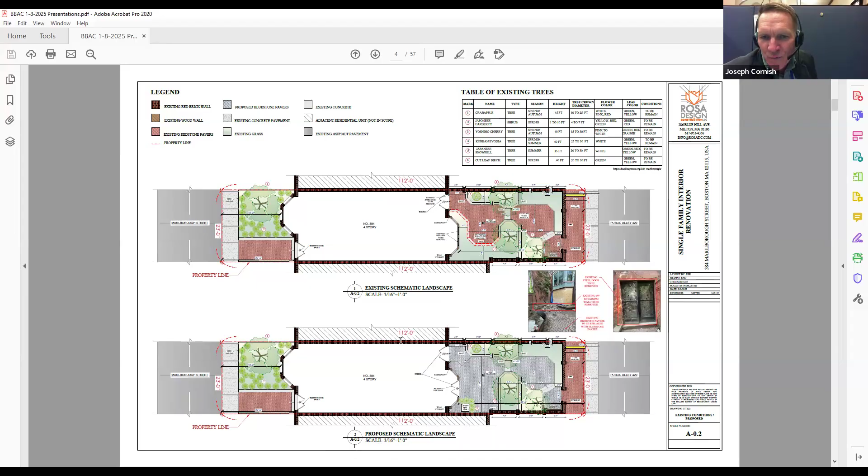Was there some concern, Joe, about the drainage? Yeah, I don't know that it specified how these were going to be laid when we reviewed it. So I think the real concern is the health of the trees, the existing trees, and that the concrete is pulled away. And I think the proposed care schedule, if we can confirm it is appropriate, that is done in the coming year. Yes. Fair enough for me for that particular part.

Thank you. All right. So Gina, should I move on to the roof? Sure. Okay. All right.

So it was brought to my attention that there may be, at the last hearing, roof work executed that was not approved by the commission. So this roof deck was remanded to staff for me to go out and review the mock-up to make it minimally visible from the street. So I did do that.

This is what I approved, and I can say the front railing is, although it is somewhat visible, it is in the location and the height that I approved it. But the rear railing was installed in kind of a jogged way. And here were the locations of the mechanical units that have been installed over in this area. Can you see my cursor here? Yes. Okay, I'll just show you.

So here's the front of the building. That was the location of the mock-up that I saw. I don't remember if it was another cold day in 2023 when I went out to look at it, but we moved it and adjusted it a few times, and it just -- we looked at moving it back further, and it wasn't really going to be any less visible.

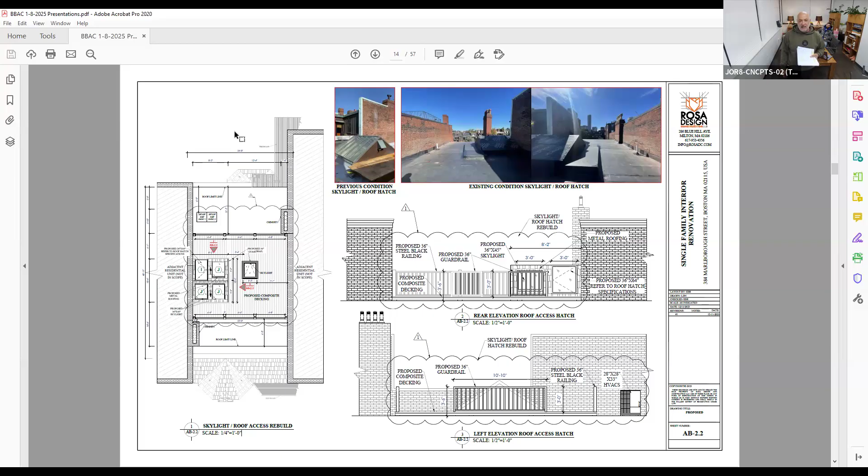Okay, so it goes inside the chimney. And then, where the short piece of the railing is, that's the correct place. The longer piece needs to line up. Okay, yeah, we can get that done. Good, I'll make a motion. All right, we'll check up on it if we need to.

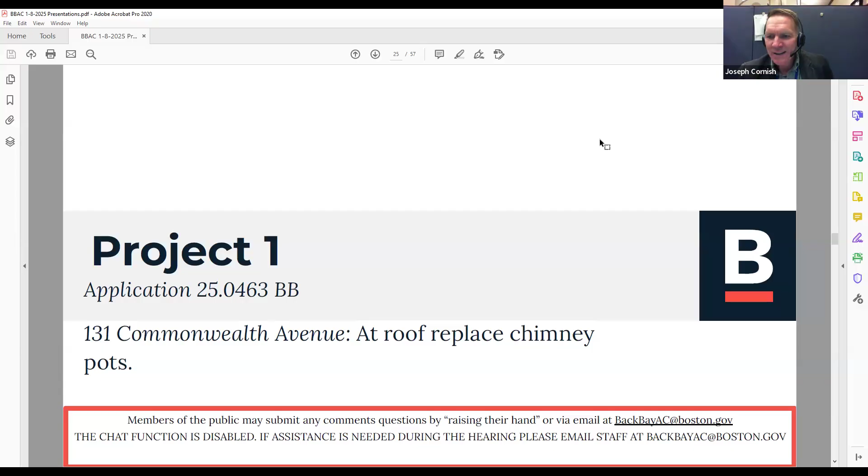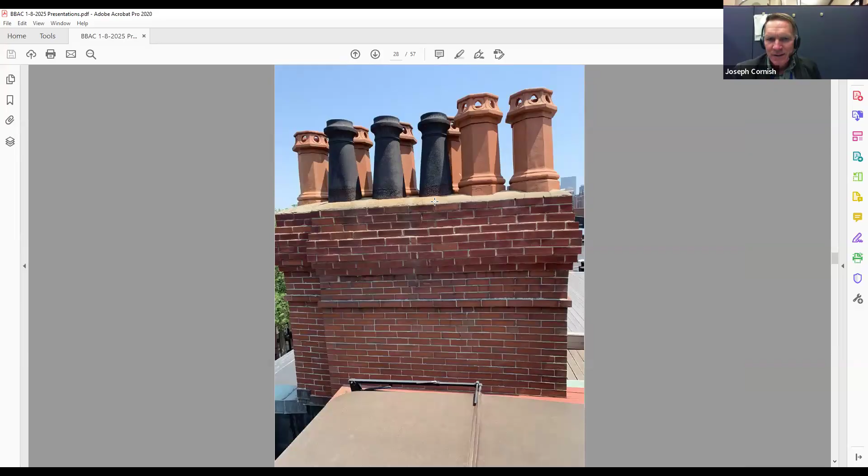Ryan, I did add some photos to show existing conditions. Here's the front facade, here's the chimney. If you can see my cursor, one of the chimneys where the chimney pots are being proposed for replacement. And here's a rooftop view, front facade, and here is the second chimney where the chimney pots are being proposed for replacement, with close-up views here. I think this is where your presentation begins, Ryan.

Correct, yes. This is representing the existing chimney pots at our chimneys. There's a combination of cast iron chimney pots as well as clay chimney pots with a bit more of a decorative cap. Currently the cast iron pots are deteriorating a little, especially at the base, where they're compromised where they meet up with the chimney. So we know those need to be replaced, and in an effort to keep it consistent across the board, we'd like to replace them so that they're matching across the spectrum with a simple round chimney pot, like the one you see right there.

If you go back to the previous page, the blue dots signify where we have the existing cast iron chimney pots, and the light orange shows where we have the existing clay octagonal chimney pots.

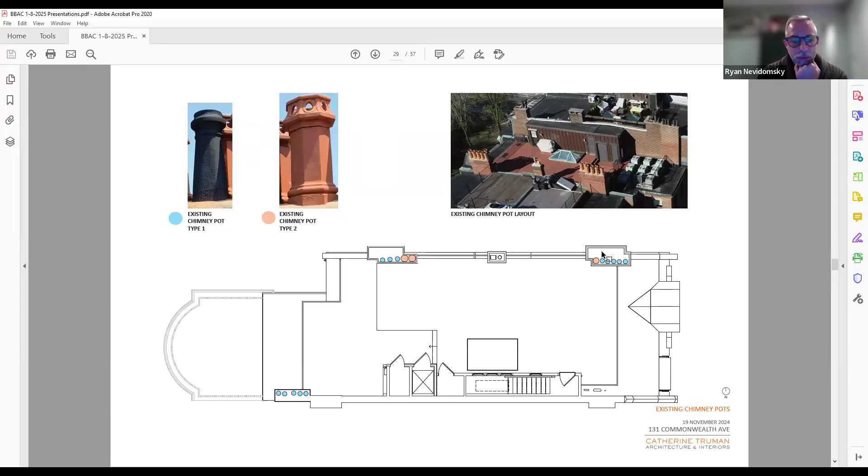So what we need to do is actually introduce some equipment to augment the fireplaces and make them code compliant for the gas fireplace and/or wood burning fireplace where we have them. So we have this laid out to show you where we will have blank chimney pots where we don't have the flues in use for anything. Those will be left alone as is, with no equipment on top of them.

The next one is in a spot where we will have the wood burning fireplace, and this is meant to help increase the smoke flow from the wood burning fireplace itself. We need to increase the ventilation because of the length between where the fireplace is and where the chimney is.

The next type is for preventing backdrafting from where we have open gas log sets in the house, and those are in spaces like the living room and kitchen and that sort of thing. Then the last type is where we have a sealed unit, a sealed gas burning unit, which occur mainly in the bedrooms.

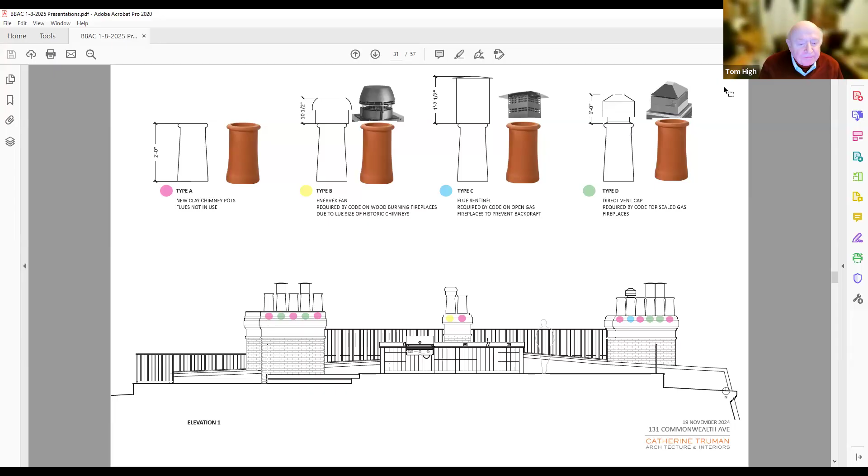And then if we look at the next page at the last elevation, our chimney pots are to the right of this drawing. Again, 3 chimney pots here have equipment on top of them.

I'm assuming there's no flexibility to change the location of this equipment. If you're going like A, B, C - is there any way to move the tall elements to the inside? No, because these flues are already set up going to those specific fireplaces within each room. That's what I was thinking. It's very, very prescribed as to what it is.

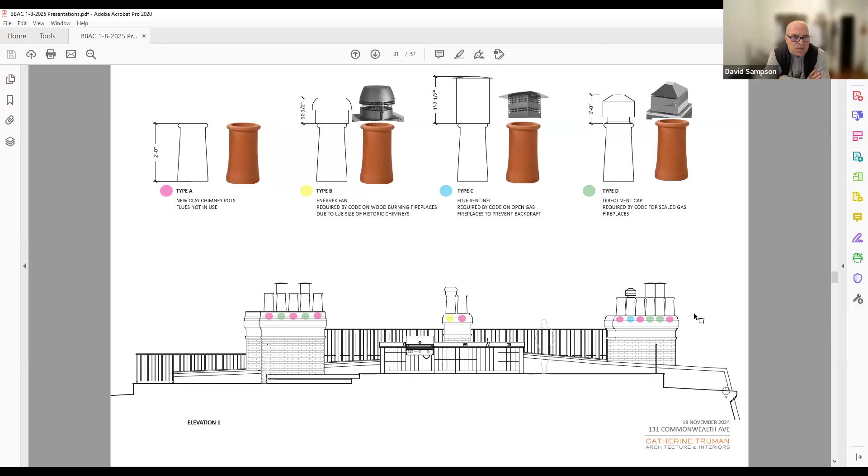What is most visible from below? If I'm down on the sidewalk looking up, what am I looking at? Those 3 end caps right there - that one is definitely going to be the one that you're seeing from Commonwealth Ave. The others, you can't really see from the street. So in this elevation, the ones to the left, you're not going to see from the street, you're going to see them from the alley, but not from the street.

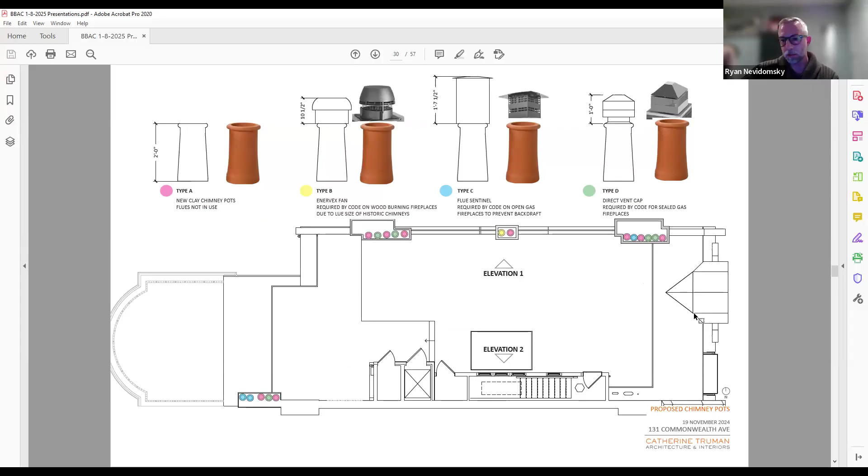And that type D appears to be a square - that is the most prominent from ComAv. How does that marry up with the round footprint of the clay? I believe that they have a cap insert that sits on so that it fits in with the round clay.

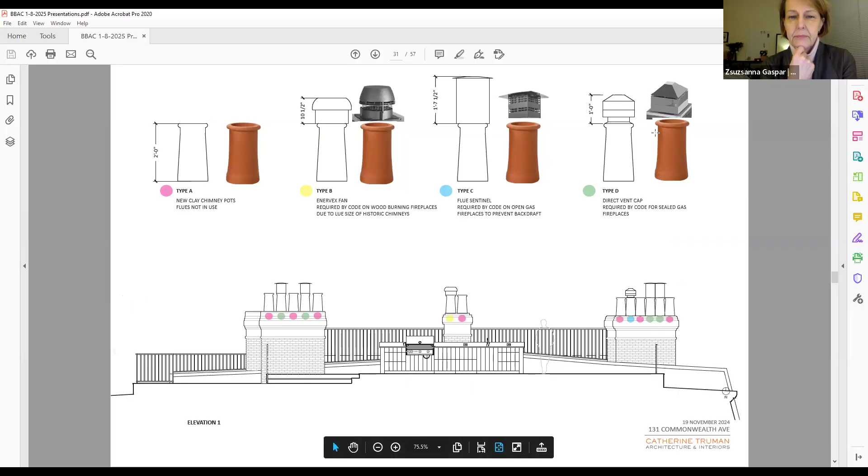And you believe that black would be the best color for these to kind of go away? Yeah, or historically, sort of the most sensitive? It's going to make it disappear the most, I think. It's just something simple that goes away.

Is it terracotta painted black, or is it just the tops you're adding to it? Just the tops are added to it - the terracotta is still underneath.

One thing to keep in mind is that, maybe in 20 or more years, this equipment will be obsolete and go away, so then we'll have consistent clay chimney pots. Very sad to see the old ones leave the premises.

I mean, the cast iron ones are nice, but they're not holding up very well. Joe, you had suggested as part of your recommendation that before we go all the way, they should further investigate both relocating the vents, which you said is not going to be possible because they're fireplace vents, but also reusing the existing pots. Do you still think that should be pursued, or given the fact that the iron ones are deteriorating, the conclusion is going to be go with this?

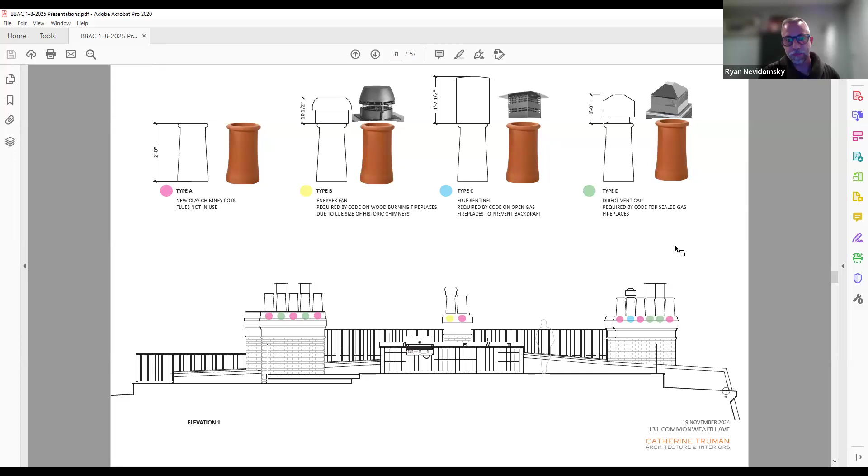Okay, thank you. Yep. Thanks, Sue. And Serge, I see your hand is up as well. Yes, oops. I would be better with unmuted.

Thank you so much. Regarding the painting of the equipment, I totally agree with the staff recommendation that all of these should be painted black, because we don't think having them shining and attracting more eyes would be better. Is there any concern that this equipment may not be painted, and we end up in a situation where they're installed but still in shiny aluminum, or can these be painted without any concern? That's our main thing. I think in this case the only solution proposed is what can be done to accommodate code, but we would definitely prefer not to have any shining elements bringing more attention to the elements on the roof.

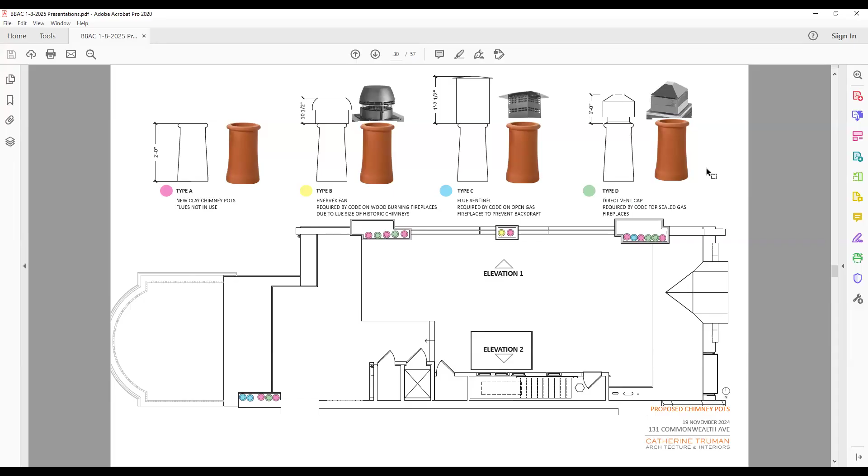Yeah, we've confirmed with the GC and the manufacturers that these can be painted. Excellent. Great, thank you. And it looks like I don't see anyone else. Do you see anyone, Joe? Or do we have any other written comments? No, no other comments.

Fantastic. Let's go back to you, Tom, for your motion please. I move that we approve this as presented with the proviso that all metal elements be painted black. Second.

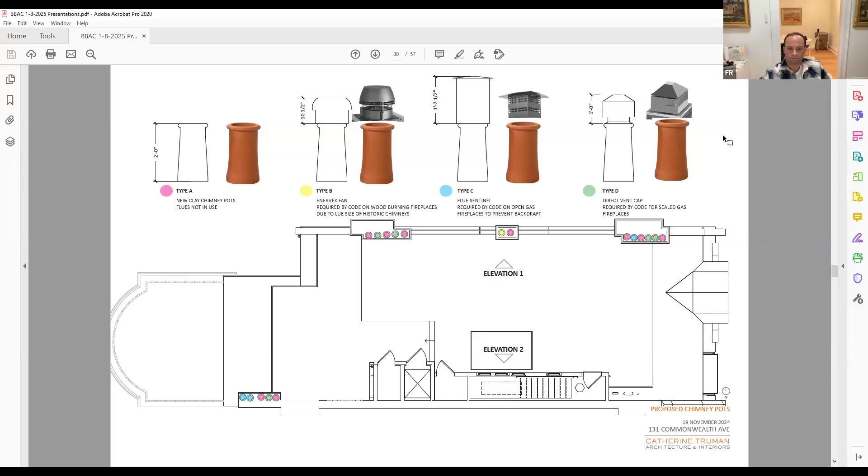Okay, and now we're moving on to an advisory review for 263 Clarendon Street. Do we have someone here from 263 Clarendon Street, please? Let's see, if you could raise your hand, who's going to be presenting? I know I saw some team members here.

All right, Mimi, you should be able to unmute yourself. Can you hear me? Yes, yes. Hi, thank you. Anyone else that I should make a co-host? Yeah, if you can elevate also Alexander Porter and Michael LeBlanc. Okay, we do have others from the school, but I think we'll invite them if needed.

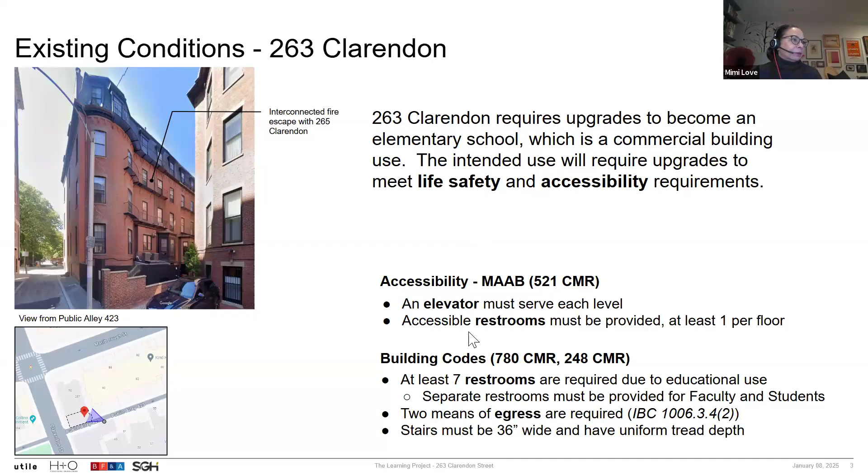Just a couple of details: the building has a unit per floor, and because we're changing the use, we need to upgrade it for life safety and accessibility. There will be a lot of interior renovations, but we're really trying to minimize the impact on the exterior to what we must do to comply with code, accessibility, and egress in particular, which is what we want to talk to you about today.

This is an aerial view of the building. It sits along Clarendon Street and Public Alley 423. We're highlighting two elements up for discussion because of the impact we're proposing. It's an existing one-story structure attached at the rear of the building, which currently has some air conditioning equipment on it. B is the main entrance of the building - it's a classic piano nobile, around 4.5 feet up to the first level, and we have to provide an accessible entrance that's equal for all. So those are the challenges that we have.

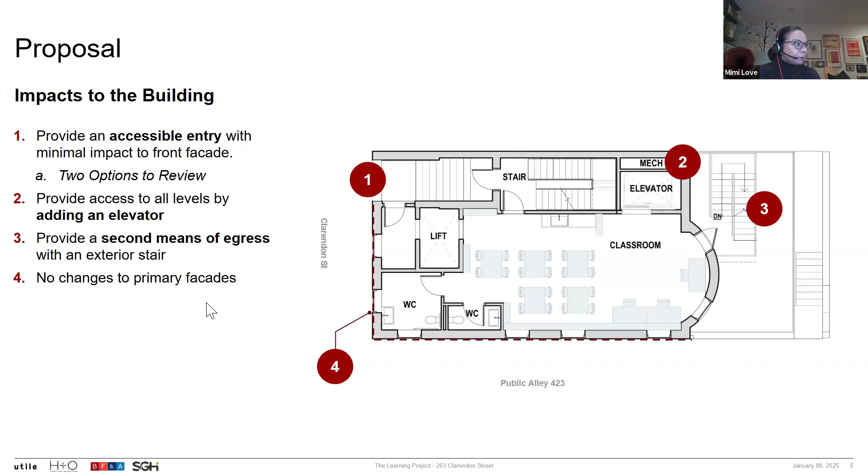Just to give you a little bit of where we really are early in the process - what we're going to share with you is at concept level, but we've had an informal review with Joe Cornish, shared some ideas, and he sent us back to rethink a few. We followed up in November, met with NABB right during the holidays and got excellent feedback, and then met on Monday with licensing and building use and heard their feedback as well. So we're here in front of you today, wanting to admit that while we have some concepts, they are not fully developed - we're not at that level of detail of knowing every detail around this project, but I trust you understand that.

So I'm going to walk you through the entry and the plan. The plan on your right is the first floor, the main entrance into 263 Clarendon. We are proposing and want to get your advice on two different approaches. In this approach, we're proposing that we push back the entrance to create a vestibule, which allows a lift to get us up to that first floor classroom level and down to a lower level, which is level with the exterior garden at the rear.

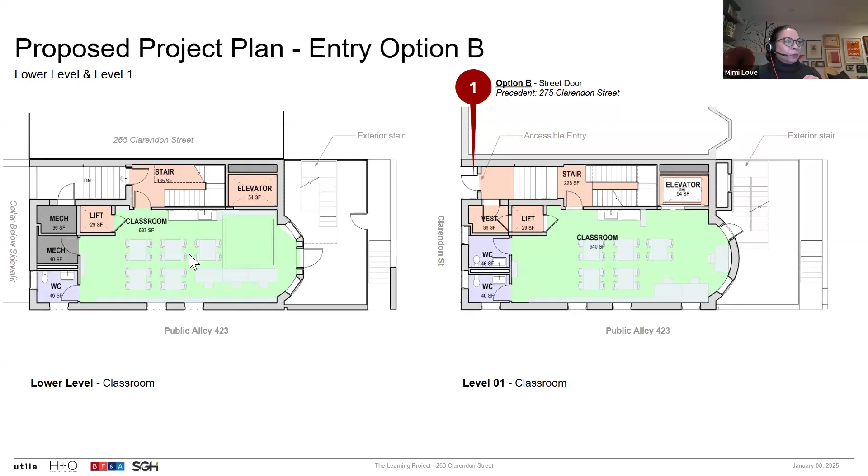The impact is very similar. We have the lift to the lower level, and then you could see the rear exterior stair that we're proposing.

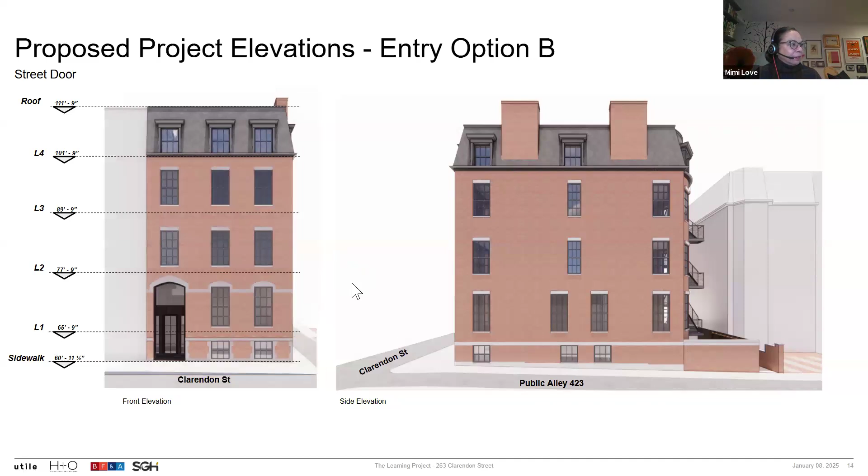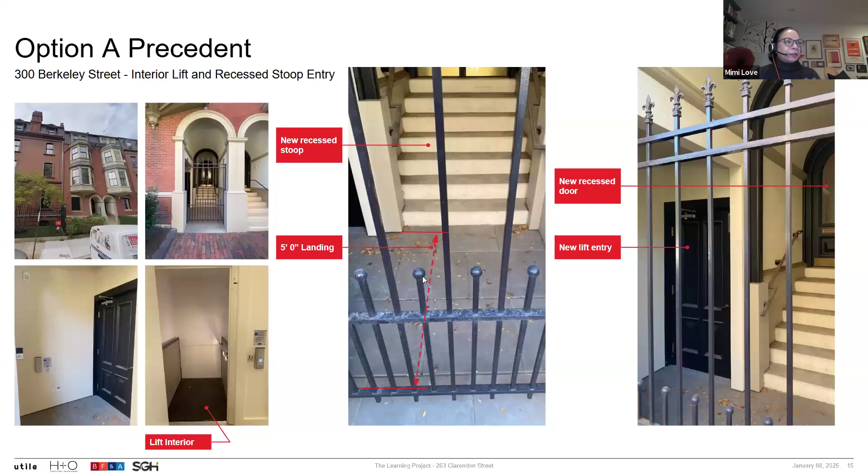Similar to that example that I keep referencing at 300 Berkeley Street, they had a condition that was paired. You can see the image with the original design on the right-hand side, and on the left, they pushed the entry back to create this vestibule to get to a lift. I don't know the history of this, but they did add a gate, and we assume that might have been for security reasons. So that's something that we're trying to wrestle with too.

The alternative approach is that we do something similar to what's happening at 275 Clarendon and even 267 Clarendon, which is two doors away. The main difference between those two proposals is we're trying to create an accessible entrance, and this still has a step. So we found something that is more relevant to what we're proposing.

Let me just say that from the standpoint of the architecture of this set of buildings, obviously no change would be the preference, but that's not on the table. Having a door, not necessarily one of the kind that you've drawn here, but one that's more consistent with 267, makes a great deal more sense architecturally, I think, than having it open and having an open area or a gateway, which didn't work very well at 300 Berkeley, but it would work even less well here because of the nature of these buildings.

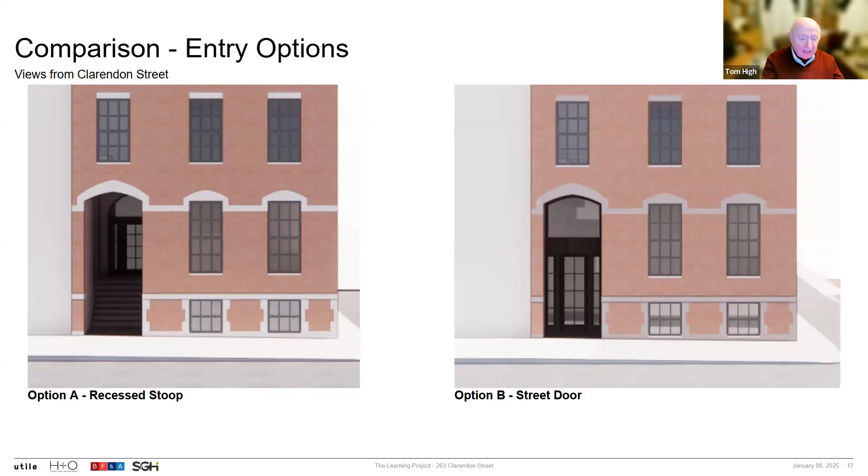Okay, I think that's helpful feedback. Maybe if you could just expand on, is 267 in your opinion more successful because it's a solid door? Is that what you're reacting to in this elevation? Yeah, I think this looks like a 1940s glass door. What you want to do is match as much as possible the symmetry and the balance of this grouping of buildings, and a solid door, I think, will work better. But you play around with different renderings. The first step is to say a door as opposed to a cavity.

Right, and I'll second that, Tom.

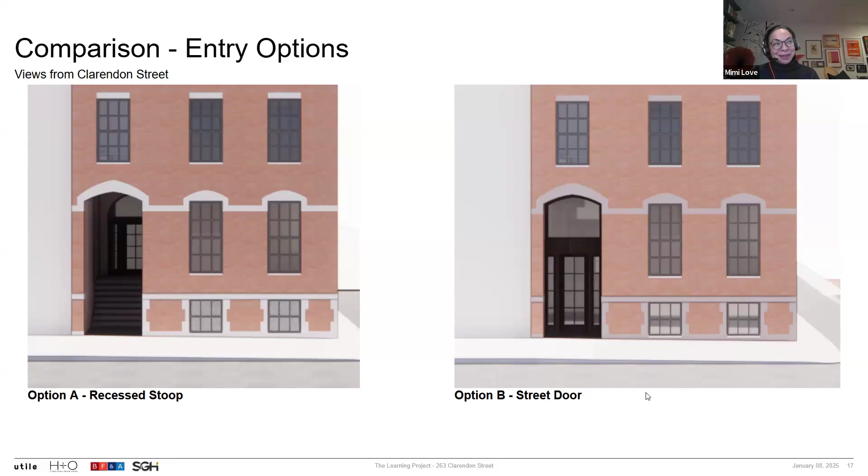Okay, that's helpful feedback. Honestly, this was the feedback that we received from NAB, and we thought it was a pretty astute recommendation. As we drew through it, we were feeling like this is looking much more in line with what's adjacent.

That requires us to move 30 inches away from the building to locate this new exterior stair. Because we're at the concept level, we haven't gotten into the detailing yet. We have more ambitious ideas than just having it look like a typical exterior stair, so we've been looking at precedents where the stringer is pushed back and the rails are a little lighter. We'll have to comply with code — it's not a typical fire escape, which sometimes doesn't meet code requirements. That's something we want to further study as we develop the design.

But we wanted your feedback on handling that condition. We've looked long and hard in the neighborhood, and you could probably point to even more examples, but the one we keep looking at is the Montessori School at 30 Fairfield, which has a very similar condition.

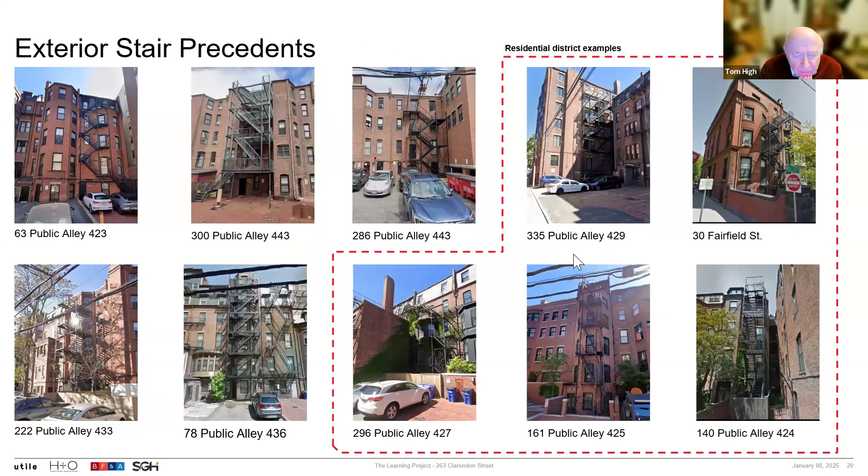Did you say it has to come out 30 inches because of the fire balconies with the neighbor? Correct. Is there no way to incorporate the fire balconies with the neighbor, if you rebuilt those fire balconies, so you could get it further back?

Because the biggest issue — and there are obviously several problems with that massive required fire escape — if you could get it closer to the building, that would make it less intrusive, because this is visible not only from the alley but also from the passageway as you look through from Marlborough Street. So it's going to be quite visible.

I can't say we've tried everything, and we'll continue to look. The issue is how the stair can be organized — the mid landing, this point here, is what's closest to our neighboring window. We can't really get access from them to the mid landing without doing something complicated. Once we touch that dimension, we're probably going to need more width that offsets from the building, because right now it's 30 inches, and if we have to meet today's code, it's going to grow to more than 30 inches.

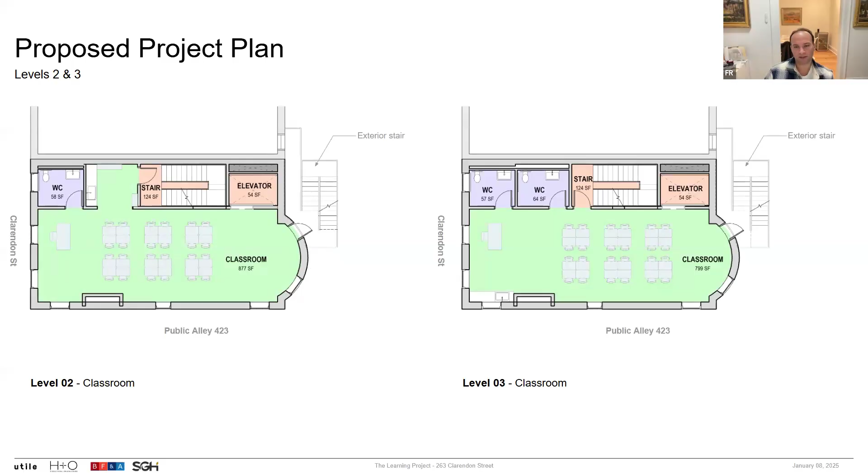One thing I want to mention — if you go back to the last slide, your rendering of the stairwell shows it one way, but when you look at the suggested light touch fire stair, it does feel like those would present differently. I think that has a nicer feel, and I'd presume it would render a little differently here. So what is the difference?

It just feels light touch — when you're looking at the handrails, they provide more transparency and are less in your face than what it feels like in the rendering. I don't know, did you guys use the light touch suggestion in the renderings?

I'd say that what we're showing in the image is a first attempt at what the stair may start to look like, but our intent is to really try to reduce the elements as much as possible. Like Mimi has said, we have to both negotiate with constructability and code requirements for these elements, making sure the guardrails resist 100 pounds per square foot, et cetera. But it's our ambition to make this look as light as possible.

To that end, in the renderings we're trying to reduce vertical elements. We have 2 vertical elements shown. We're fairly confident with our structural engineer that we'll be able to accomplish the stair with those 2 vertical elements. I think the detailing of the stringers and the tread nosings could still be worked on a lot further to get closer to the images we're showing.

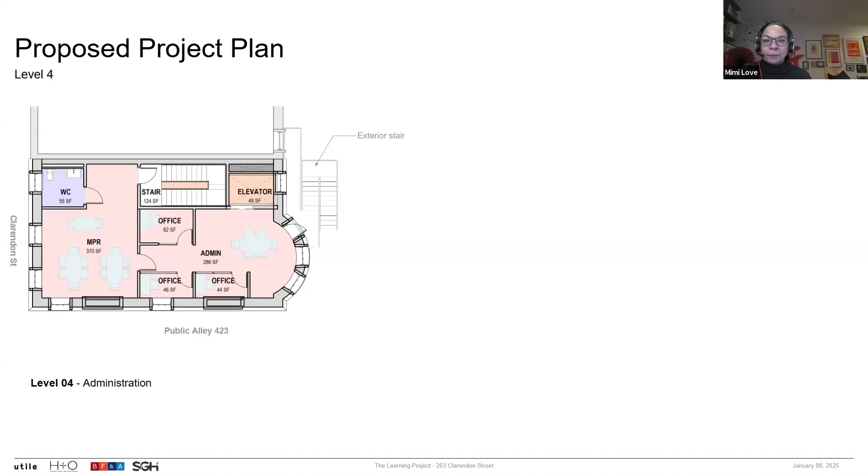Maybe I'll go back to the last image while you're thinking about additional comments. I know you're not presenting anything definitive yet, but one of the things we're always concerned about, and it's especially difficult on a building that's on the corner of a street or in a passageway, is the visibility of elevator overrides and HVAC equipment.

Did you say there would not be an elevator override? Yeah, that's what we're working toward. We definitely have enough height, we believe, to accommodate the elevator overrun, and work with an elevator consultant to reduce that overall height and position the hoist beam so it doesn't extend beyond the roof.

Great, because where you've located the elevator, it will be very visible if there is an override. Right. And I think that where we've located it is also probably one of the least visible possible locations, if you consider other locations in the plan, except possibly dead center, which would make the plan almost unusable.

So, but I agree with Mimi that we are optimistic. We haven't scanned the building, so we don't have a perfect understanding of the depth of the attic, but we're pretty optimistic we can capture the elevator within the existing roof.

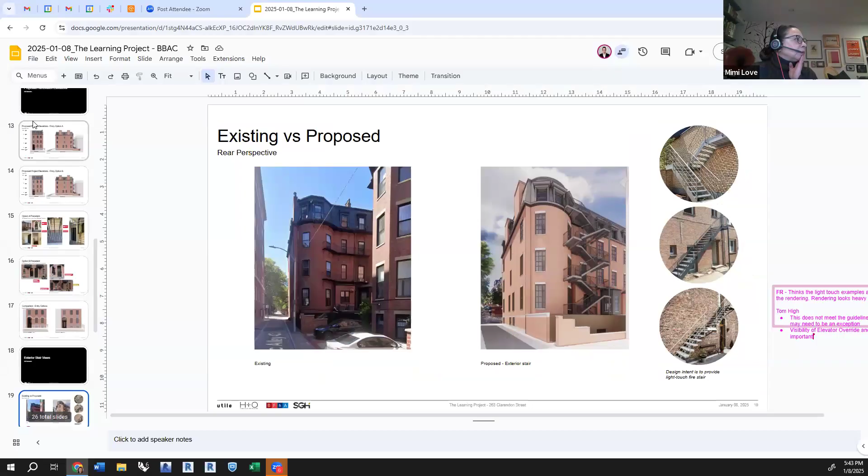I'm going to go to the aerial. I believe this might be helpful, just to show you where HVAC equipment exists. That's where it belongs, that's great. Yeah, the current thought is that this would be replaced in kind and not extend in terms of dimensions.

And you'll remove the HVAC equipment that's down below there too. Correct, this will at least improve that by not having that be there. Because it won't be condo units any longer, it'll be a different system that will probably have fewer condensers serving the whole building. So we're optimistic there won't be a visual impact to the HVAC solution.

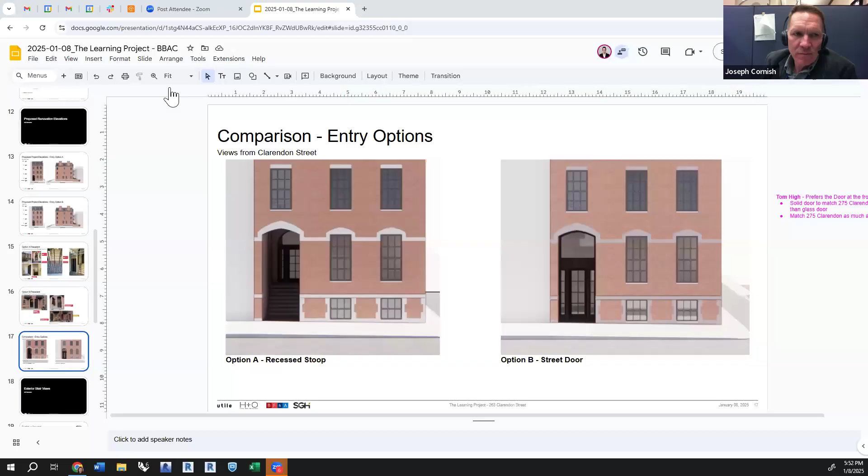So, maybe if I go to slideshow - this proposal is quite deeper than an elevator would be, because it's a second stair running parallel to the property, to the alley. If we did an elevator, it would come off the rear less, but it still would be a structure. In this case, we were doing some gymnastics where we didn't even take the stair all the way up to the 4th level. We were respecting that cornice line and doing some gymnastics to transfer the stair within, because we thought maybe crossing that cornice line was way too much of an ask. So an elevator would be more complicated because we'd have to get it up to that 4th level for accessibility. It might not come out as much to the rear of the property, but it certainly would be taller.

It also would provide a barrier between you and your neighboring buildings, so you run into the fire issue again. Right, and so we just thought, this does need some work, admittedly, in terms of design, but the lightness and the airiness - we can at least imagine that we could improve upon that, versus just creating a solid mass, which I don't think would be the right approach.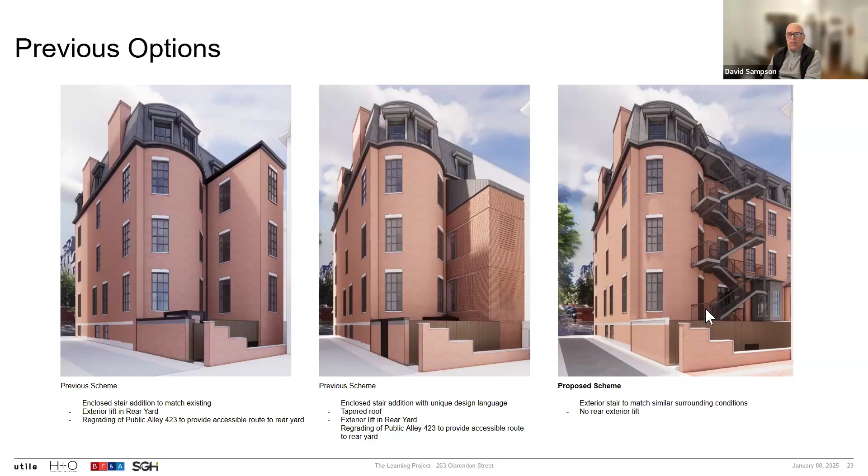The question I have is, do you have to improve the current egress of those fire escapes? Do you have to do that, or is it just something you want to do? For the neighboring building, or for the school? We have to provide the second means of egress for both, for the school. They currently have that now with the current fire escape that goes from one window to the other window - that's the logic behind the current escape.

Right, are you required to make stairs now? So we need to, in order to have a school and education use in this building, have a second means of egress. That's a fully compliant stair that meets all of the dimensional requirements for a second stair. And are you saying that it also has to connect with the ground, is that what you're saying? Yes, for egress to the ground, for it to be a school, it requires you to have stairs to go from top to bottom. Okay, got it. We need to have two ways to exit the building at every level.

So you currently have that? In this condition, we do not have that. In this condition that we're proposing, we will have that. I think Dave's point is that currently you have the ability to exit the building and go to the building next door via the existing balconies, but what you're saying is that because it's a school, that's not allowed under the law. You have to have the ability to get to the ground level from your building. Is that correct? Correct, I think that's right.

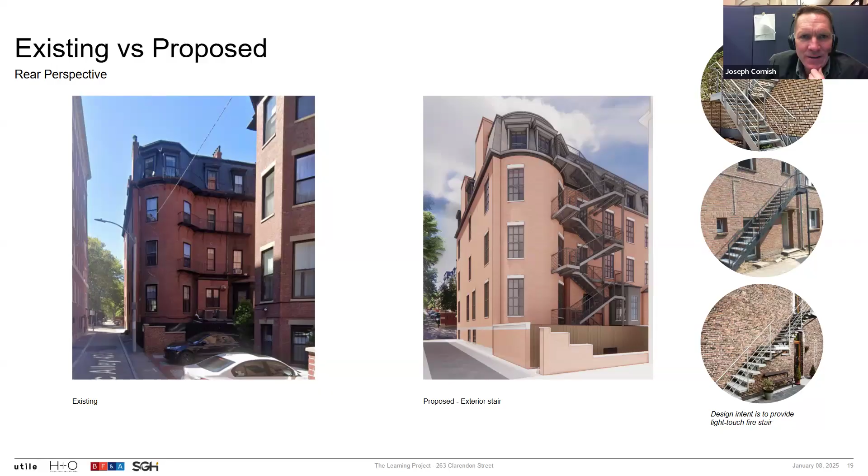Also, Joe, did you see the public comment that was sent via email for 263 Clarendon? No. So Margaret Smith Bell emailed us a question saying you mentioned that there would be fewer AC condensers. Can you comment on the potential noise compared to current condensers? She submitted that 9 minutes ago.

Okay, thanks, Sarah. And all I'll say is that we're too early in the process, but the next time we come and meet with you all, we'll note that question and try to have an answer for you. And noise is outside of our purview, just to reinforce that. Okay, thank you, but even just having a sense of what the equipment is. Yes, sure. Thank you very much. Thank you. Really appreciate the feedback.

It's our pleasure, and we'll move on, Joe, to the next agenda item. And that's administrative review. Okay, do we have a motion to approve the administrative review?

Motion to approve? Second. I'll second that. Tom beat you to it. Sorry, okay Tommy, I withdraw my second. All right, David Sampson. Yes. Tom High. Yes. Gina Dimitriadis. Yes. Kathy Connor. Yes. Susanna Gaspar. Yes. Tanvi Nair. Yes. And Franklin Ross. Abstain. Okay, thank you.